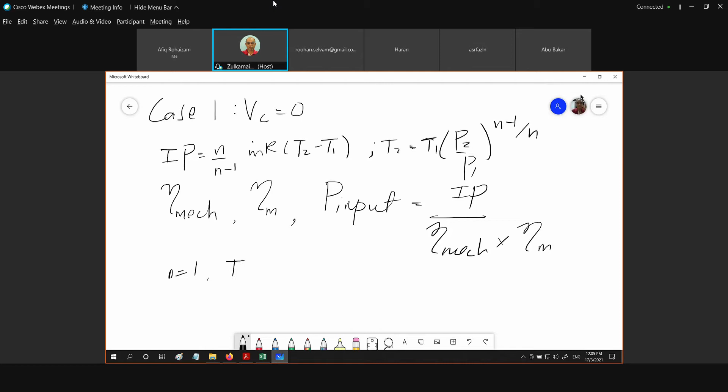So in this case, the power input to the air is equivalent to IP divided by the mechanical efficiency and the efficiency of the motor itself, right? Then we look at the critical minimum input of power into the air, where the ideal case is n equal to 1, so T is constant. We are left with a power stated as P iso, or P isothermal, which is equal to PV ln P2 over P1, equal to m dot R T ln P2 over P1.

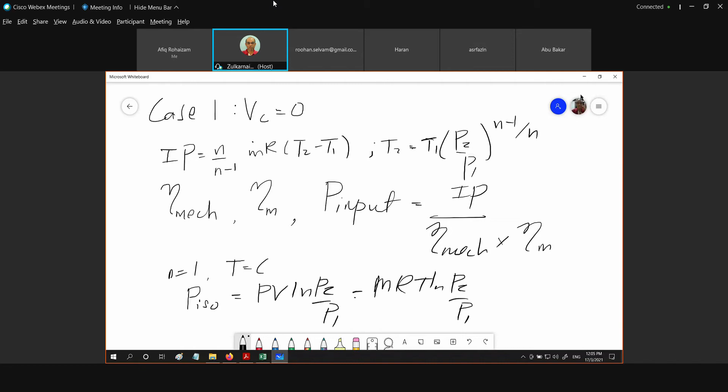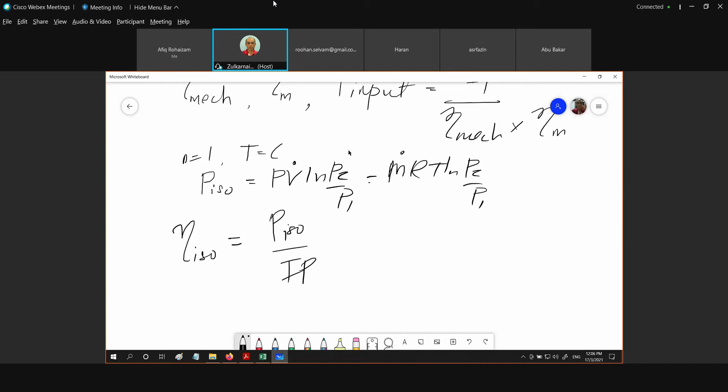When we look at the P iso, we have another parameter called the isothermal efficiency, which is equal to P iso divided by the IP, to see how far apart the minimum, ideal case of compression with T constant is from the IP. So this is what we have looked at, right?

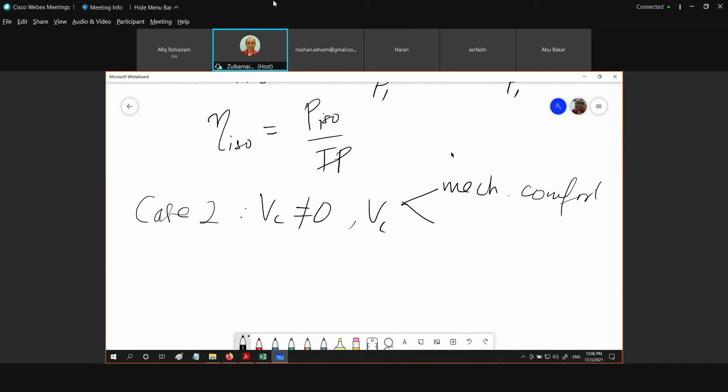One more thing we looked at is case 2, where VC is not equal to zero. Why do we need the VC? Because we want mechanical comfort, to allow the expansion of different materials when heat is involved in the compression process. Another reason for the VC is that we want a gap, or space, for the valve, right?

So with the VC, the clearance volume, previously the mass of air intake to the system is MA, for the case of VC equal to 0. But when VC is not equal to 0, the air inlet to the compressor is MA minus MD. So it's less air mass input. That is the drawback of having VC not equal to 0.

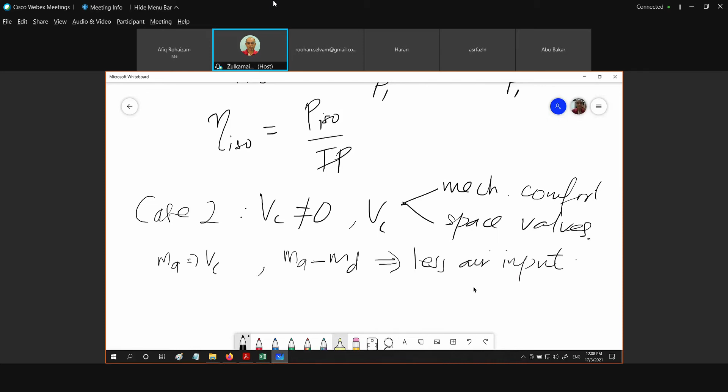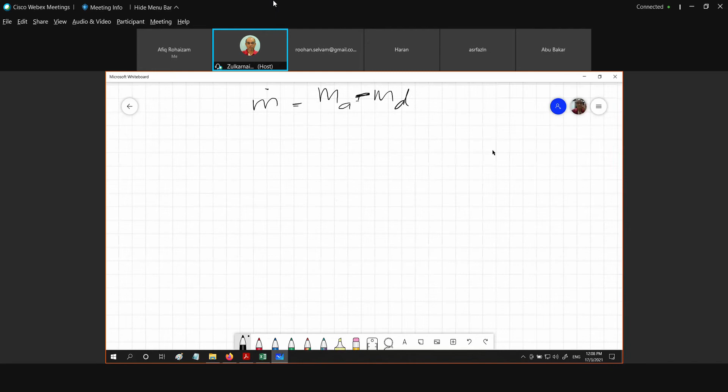As far as the IP is concerned, it's still the same formula: IP equals n over n minus 1, m dot R (T2 minus T1), but in this case m dot is equal to MA minus MD. For VC equal to 0, m is equal to MA. You can refer to the PV diagram. Now I want to look at the diagram for the case of VC not equal to 0. So this is our PV diagram.

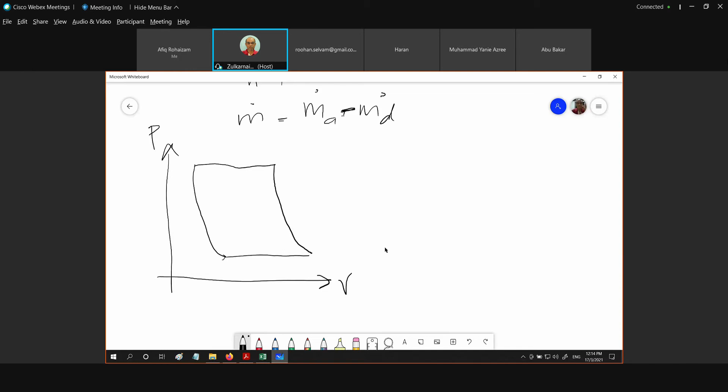Okay, so this is A, this is B, the compression process, and then B to C is the delivery process, and C to D is the expansion process due to the leftovers of air inside the clearance volume. Okay, so this is VA, this is your VC, right? And then this is your P1, and this is your P2. Okay, this is what I'm talking about.

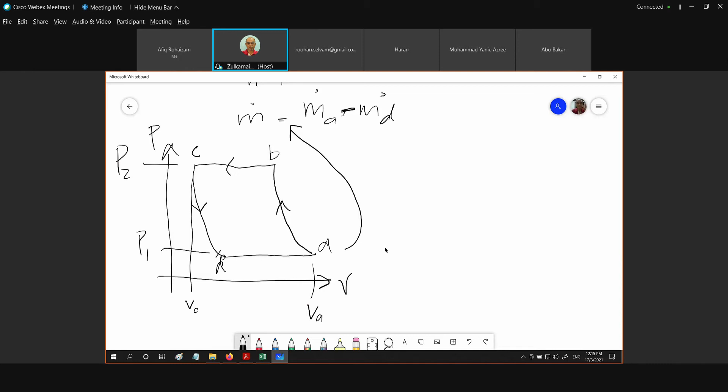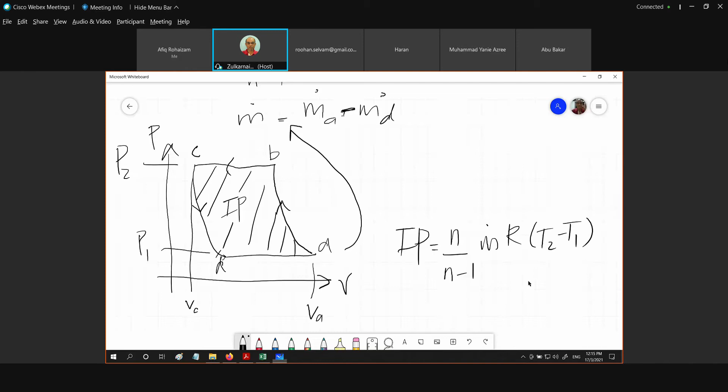The m dot is equal to mA minus mD, this part and that part. Okay, so in order to get the IP, which is the area of this shaded cycle, the IP equation is still the same, n over n minus 1, m dot R (T2 minus T1), whereby T2 is still the same: T2 is equal to T1 multiplied by P2 over P1 to the power of n minus 1 over n, right?

But in this case, the m dot right here is equal to m dot A minus m dot D. So this is the part for the induction of fresh charged air. This is in terms of kilogram per second. But if you look in terms of per cycle, this is equal to mA minus mD.

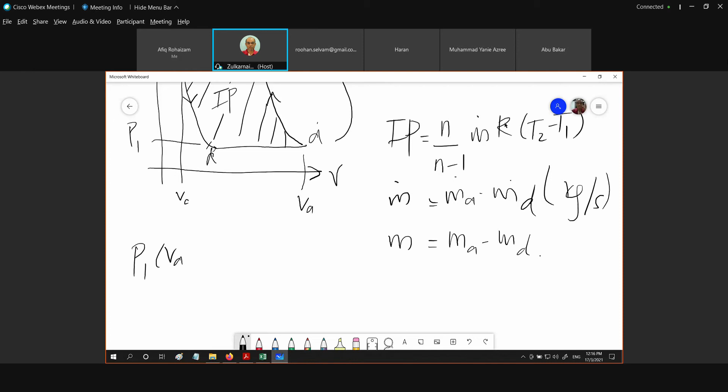Okay, and at this P1 condition, we can see that P1 (VA minus VD) is equal to mRT1. This is state 1. This is what we can use at point A, whereby P1 (VA minus VD) is equal to mRT1. Right? So this is the first equation that we must know.

And then after that, we look at how we relate VA, VC, VD in terms of VS. Okay, so we want to put VA minus VD and VC in terms of VS. Usually, VC is given as a percentage of VS. Let's say we take 5%, for example. So this is what we have: VC is equal to 5% of VS.

Right? So if you want to find VS, we look at our PV diagram. Okay, bear in mind, we want to calculate what is VS. So if we look at the PV diagram, what is VS? VS is the swept volume. So our VS should be from this point up to this point. So this is the VS.

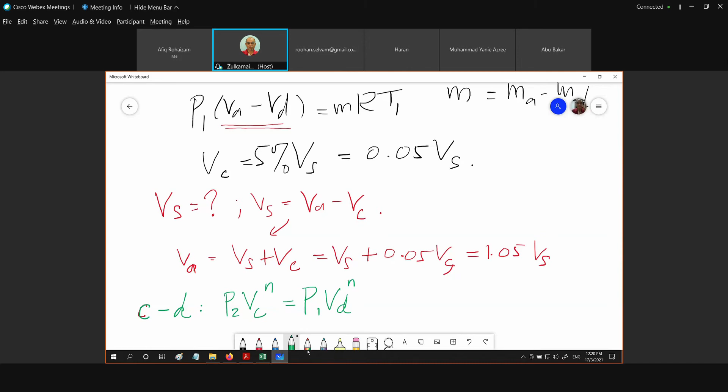So to look at how we change VD in terms of VS, we look at the process from C to D, whereby at point C we have P2 VC to the power of n, which is equal to P1 VD to the power of n. So the process from C to D is the polytropic expansion right here.

This is PV to the n equal to constant, same thing for A to B. The expansion and also the compression process are polytropic. So what we have right here is PC VC to the n equal to PD VD to the n. What is PC? PC is equal to P2. And what is PD? PD is equal to P1. So this is what we have.

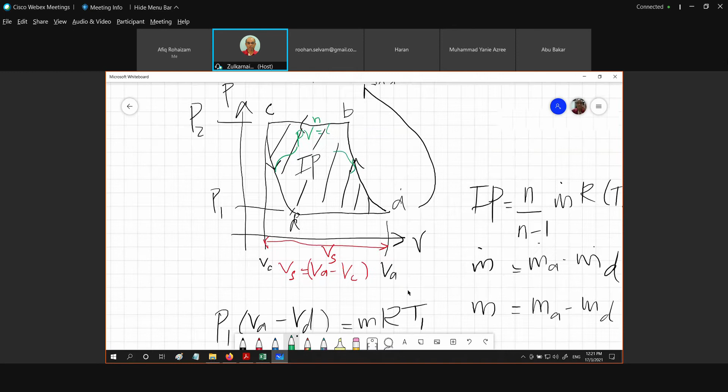Okay? So this is what we have. So right now, we could write the VD. So the VD over VC to the power of N is equal to, right? So this is VD over VC equal to P2 over P1. Then we write VD as our subject. So what is VD? The VD is equal to VC times P2 over P1 to the power 1 over N.

And again, we know that the VC is put in terms of VS, this is 0.05 VS times P2 over P1 to the power 1 over N. Meaning that if we know the pressure ratio and the value of N, then we could have the VD in terms of VS. So now we have put the VD as a function of VS. Then we got this VA minus VD as a function of VS. Okay? So right now, we need to know what is VA minus VD.

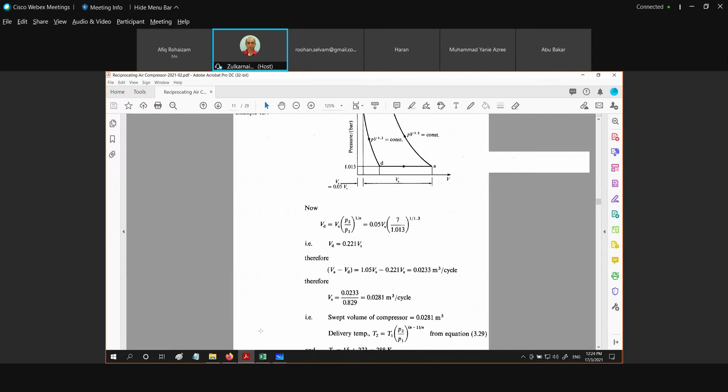So right now, let us look back to the question that we looked at the last 2 days. This is the question. Okay, put it on the whiteboard.

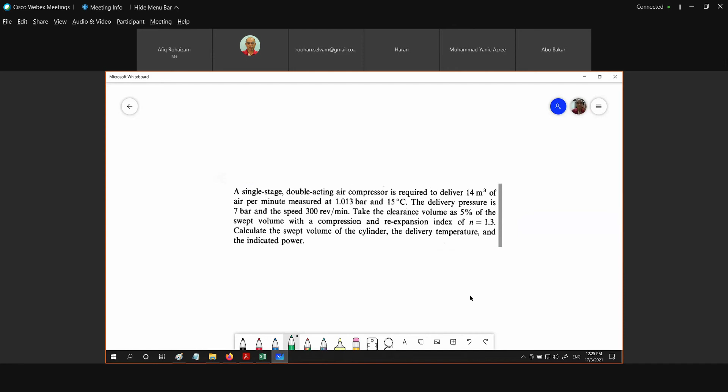Okay, a single stage double acting compressor is required to deliver 14 meter cube of air per minute, measured at 1.013 bar and 15 degrees C. The delivery pressure is 7 bar and the speed is 300 rpm. The clearance volume is 5% of the swept volume and the compression and re-expansion index is 1.3. Calculate the swept volume. The same thing, right?

So remember, this value is for double acting. So we might convert this for one portion of the compressor. This is for both sides of the compressor because it's double acting. So in order to get the VS, we need to see only one side. If you maintain this 14 meter cube value, then you will get 2 VS, both VS. But the question asks for only VS. So you need to divide by 2.

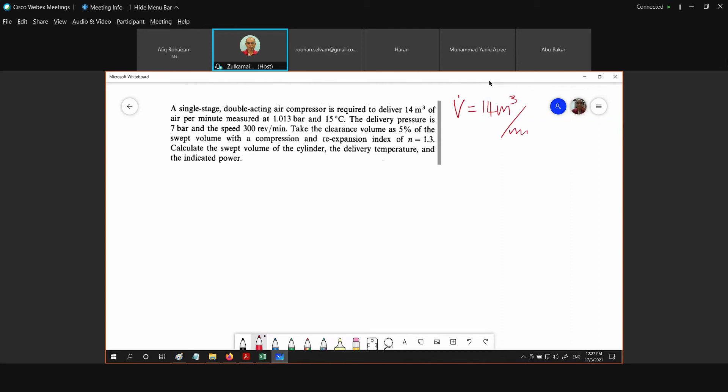Okay? So if we put all the parameters given, the V dot is equal to 14 meter cube per minute, measured at the pressure P1 equal to 1.013 bar, and T1 is given as 15 degrees C. Then the P2 is given as 7 bar. Then the speed N is equal to 300 RPM. Next, the VC is given in terms of VS, 0.05 VS. Okay, so we need to get our VS. The question asks for VS.

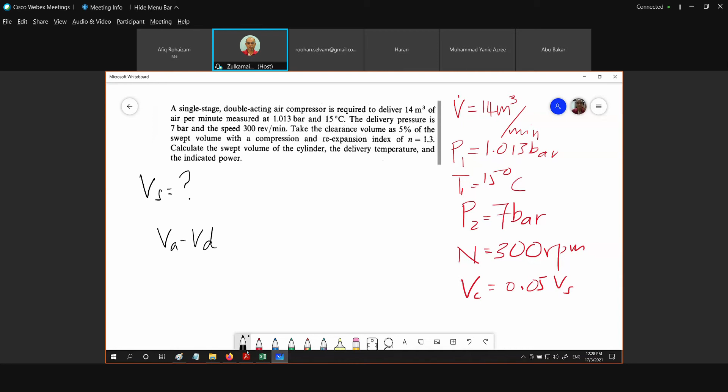Okay, so first we need to get VA minus VD. So VA minus VD dot, like I showed before, is equal to m dot RT1 over P1. In this case, we know the R value and the T1 value, then we need to define m dot. How to get m dot? We take it at point 1. This is equal to P1 V1 dot over RT1.

Okay? What is our P1? P1 is 101.3. I will put it in kPa because I'm going to use R as 0.287 kilojoule, meaning the pressure has to be in kilonewton or kPa. Then multiply this by 14. But remember, we need to convert for one side, so this is 14 divided by 2. And then you see that this is in minute, so we need to change from minute to second. This is for the conversion of the V dot.

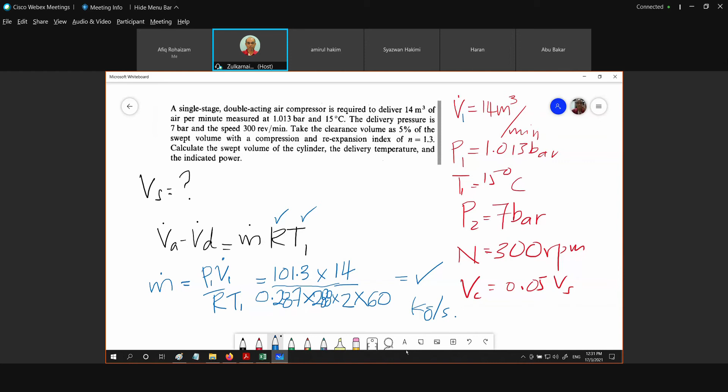So once you have your m dot, what do you get? You get your VA minus VD, correct? So this is your VA minus VD, which is equal to V dot A minus V dot D divided by N. Okay, so from here, once you solve your m dot, then you get VA minus VD dot in terms of value. And this value you put in here, then you get your VA minus VD in terms of meter cube per cycle. Again, be careful with your unit.

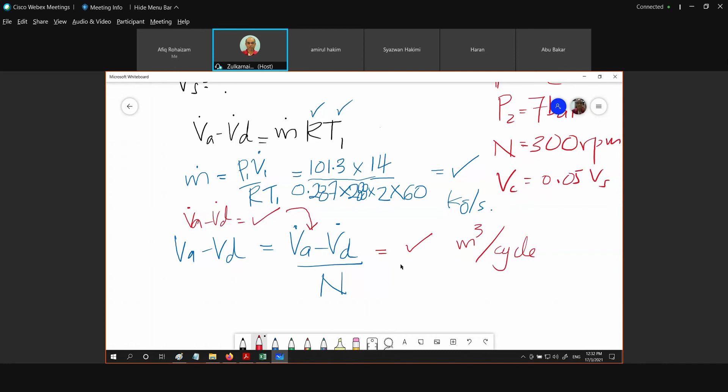If you put right here, your m dot is in kilogram per second. Right here, you are going to get meter cube per second. Then you need to change your 300 divided by 60. Okay? So I think that is being shown. Right now, I want to show you the formula involved because all the figures are inside the text. So when you have your VA minus VD, then you need to put your VA.

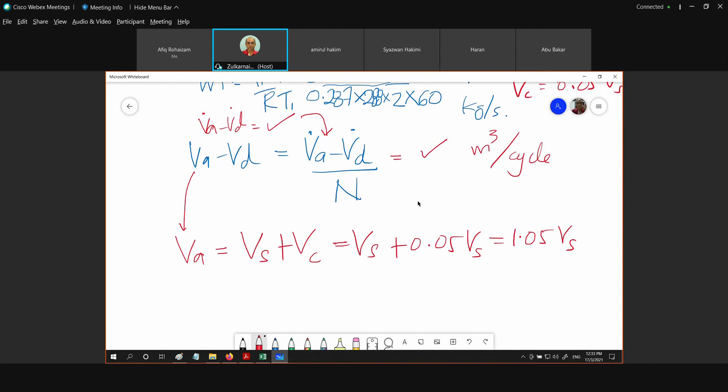What is your VA? So VA is equal to your VS plus VC. This is equal to VS plus 0.05 VS. So as far as VA is concerned, you get your VA equal to 1.05 VS. This will solve for that VA. Okay, then what you do, you put your VD in terms of VS. So again, what is your VD?

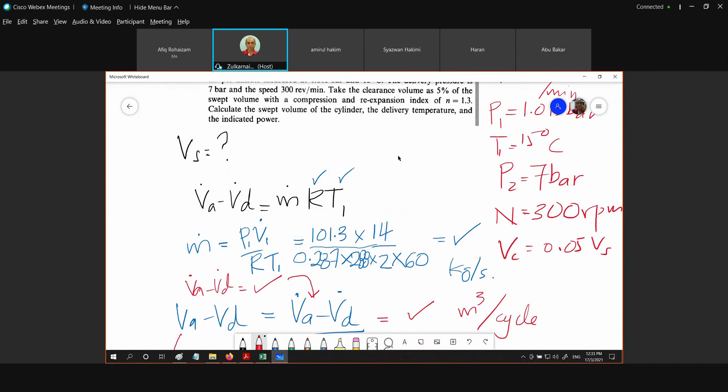Your VD, as I have shown just now, is equal to VC times P2 over P1 to the power 1 over N. Then you put in terms of 0.05 Vs. Your P2 is 7. Your P1 is 1.013. 1 over N, and the index of expansion and compression is 1.3 right here. So you put here 1.3. Can someone calculate for me how much that is in terms of Vs?

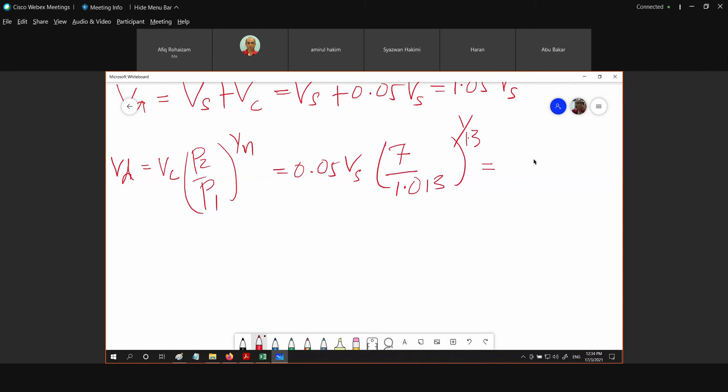Is it 0.2212 Vs? Yes. How about others? Do you get the same figures? Yes, sir. Thank you very much. So now you have solved your VA and your VD. So what we have right here is VA minus VD, right? 1.05 Vs minus 0.2212 Vs. So you are getting one value in terms of Vs.

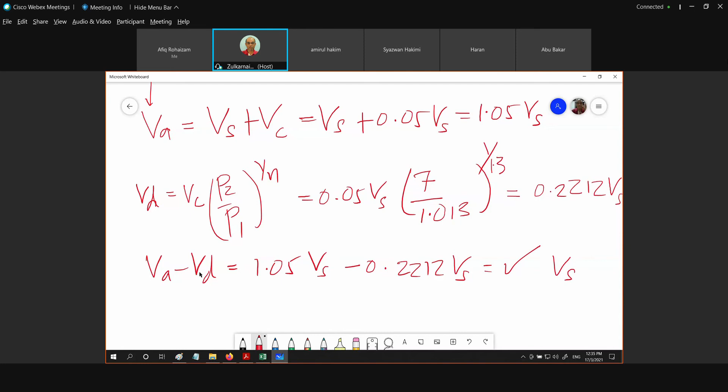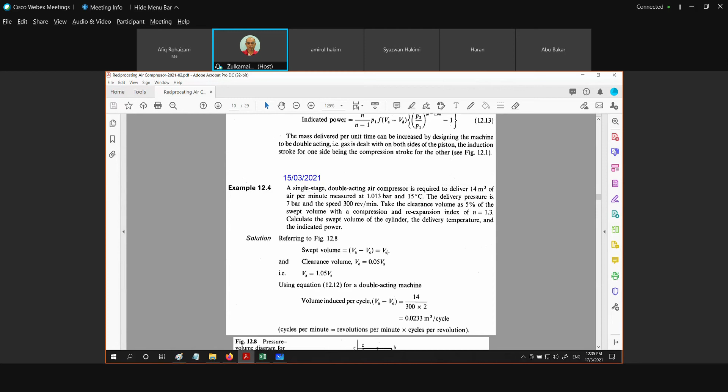And then what you do is equate this VA minus VD in terms of Vs to this value. Okay, this value. You equate that. Then once you equate, you solve for your Vs. Okay, from here, you know that your Vs is solved. So that is what is being shown right here. See? So this is your swept volume. VA equal to Vs plus Vc. So this is the clearance volume given. This is your clearance volume.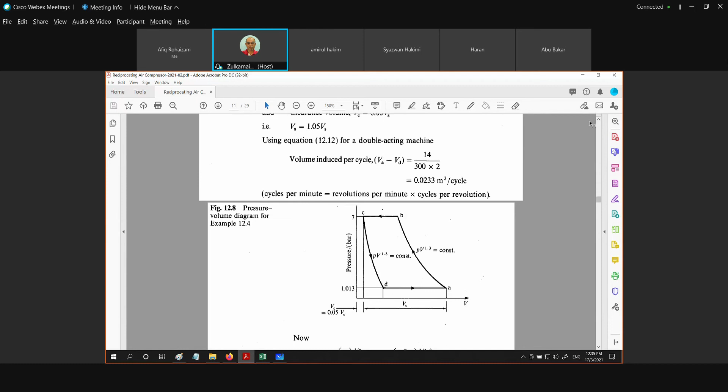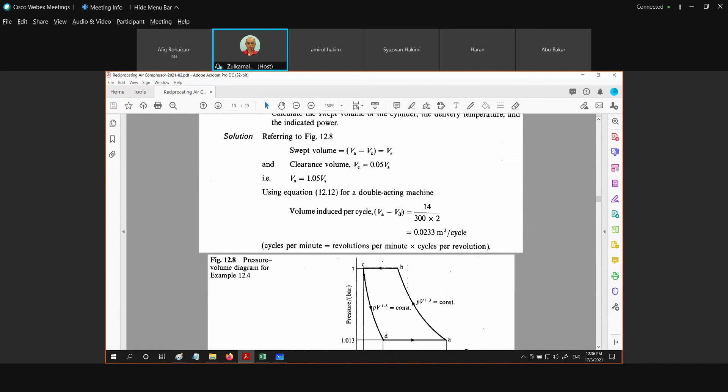See now, the VA minus VD is equal to 14 divided by that. So here you put VA minus VD, 14 divided by 300 divided by 2. Okay, now the 14 is maintained in meter cube. So you get your VA minus VD per cycle. Then again, this is your VD. We have done that. Then we get the VA minus VD 0.0233. Then you equate this, and you get your swept volume. So this is your swept volume. Okay. Next one.

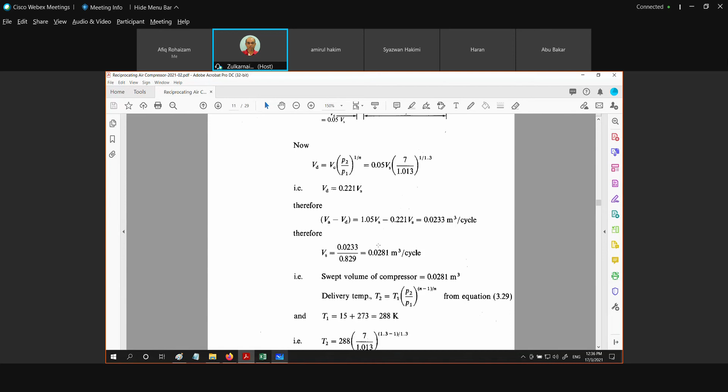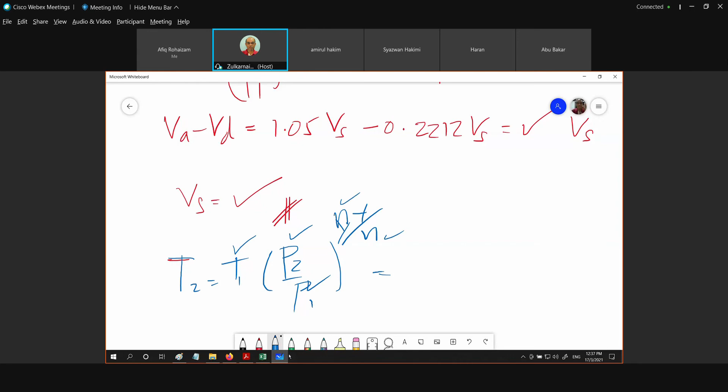The next question is to get your IP. Oh, sorry, the delivery temperature. So of course, for the delivery temperature, we are going to use the formula of T, yeah? T2 is equal to T1 times P2 over P1 to the power N minus 1 over N. So in this case, everything is given, then you get your T2. Next one is to get the IP, if I'm not mistaken. The indicated power.

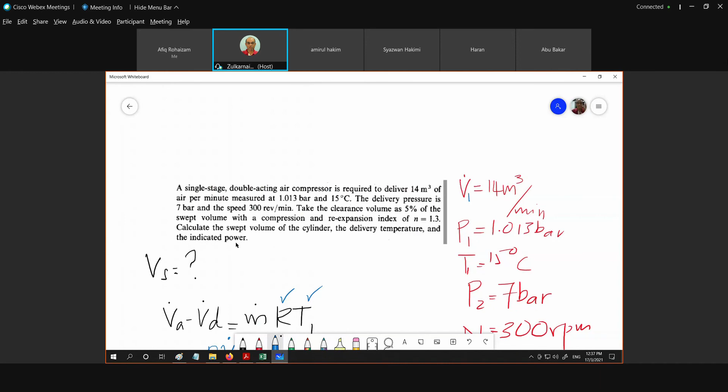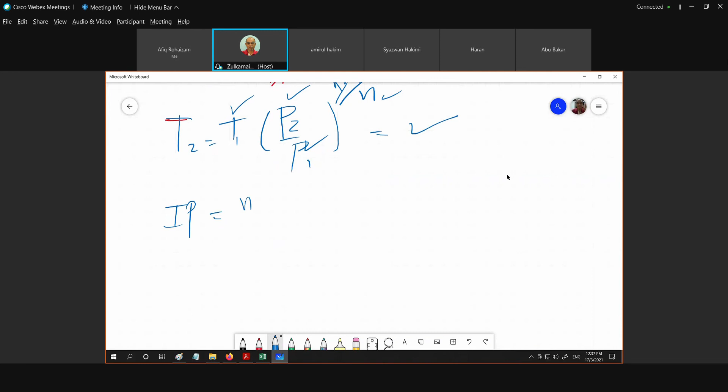So the IP is equal to N over N minus 1 times m dot R (T2 minus T1). I like to use this equation in terms of temperature. You can also put it in terms of pressure ratio, but be careful, sometimes you mix up the N value. This can also be written as N over N minus 1 m dot R T1 times (P2 over P1 to the power N minus 1 over N, minus 1). You can also use this formula, no problem. But I like to use this formula. It's very neat because you have defined your T2.

Right, and then again, you could be asked to get the PISO. So PISO equals m dot RT ln(p2 over p1). So be careful, right?

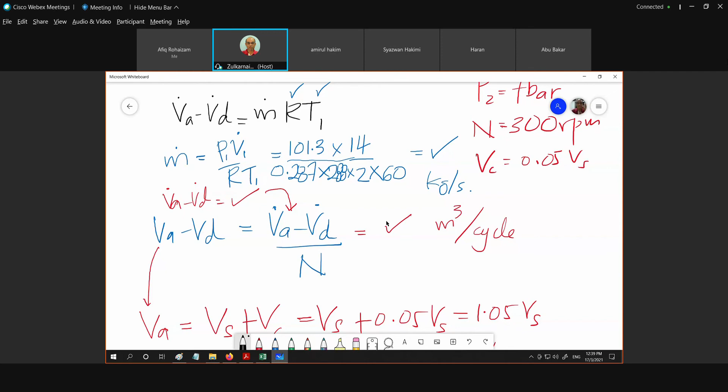Guys, remember this one? We have divided by 2, right? So this m dot is the one side of m dot, only one side because we have divided by 2. But as far as the IP is concerned, here, if you use the same value, the m dot, then you need to multiply by 2.

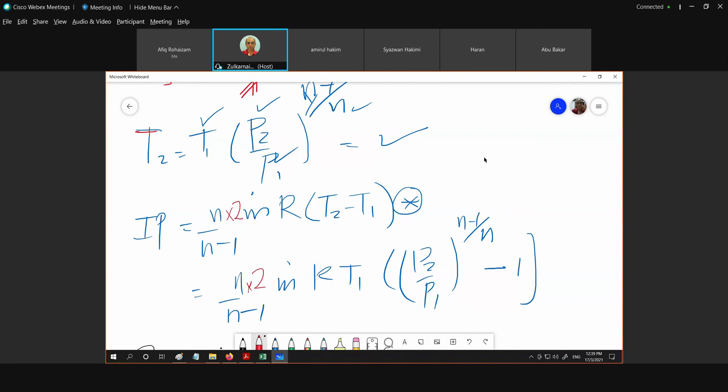2 m dot, again here also 2 m dot. Sorry. So please take note, because the m dot we have calculated before is for one side, but the IP is for both sides, for the compressor itself.

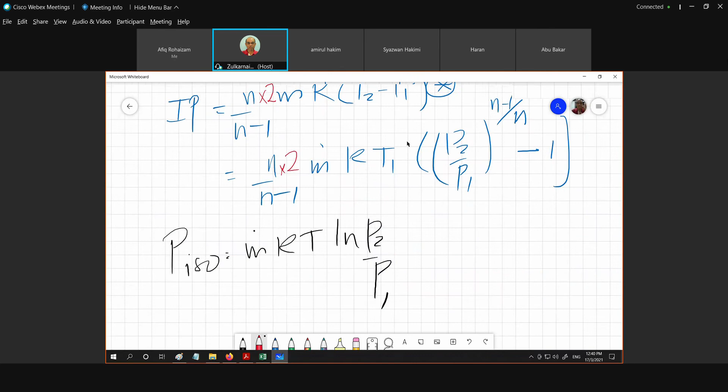Same goes for the PISO, the PISO also you have to multiply by 2 right here. And once we have determined the PISO, if this question asks for PISO, then most probably you'll be asked to get what is your isothermal efficiency, which is equal to the PISO divided by the IP.

So this is the typical question for reciprocating compressor. If you do all the questions asked and add up with the PISO, and then maybe add a bit on the mechanical efficiency, or maybe add a bit more in terms of the motor efficiency or the engine efficiency, then this type of question, the difficulty is treated as moderate for exam question or for the test question. Bear in mind, take note, your test question level is equally as exam question.

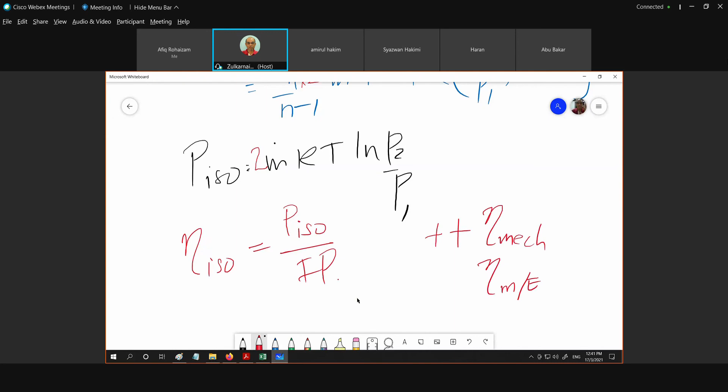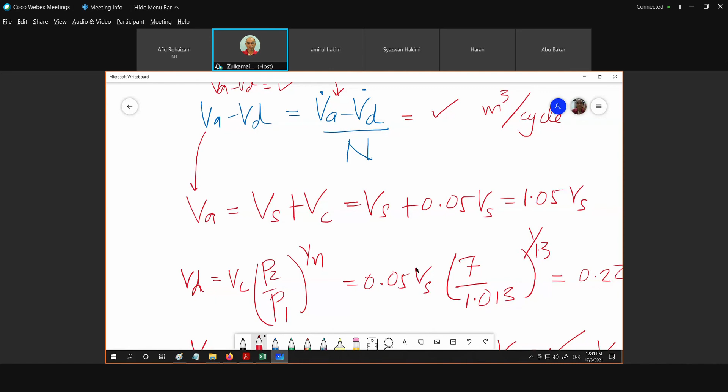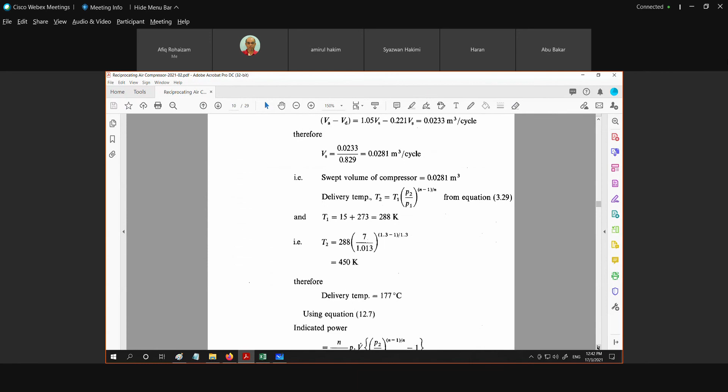Okay, any question? Guys, any question? No, sir. Okay, thank you very much. No question right now.

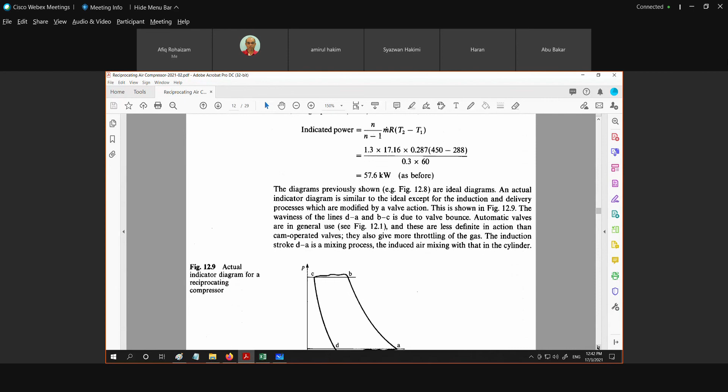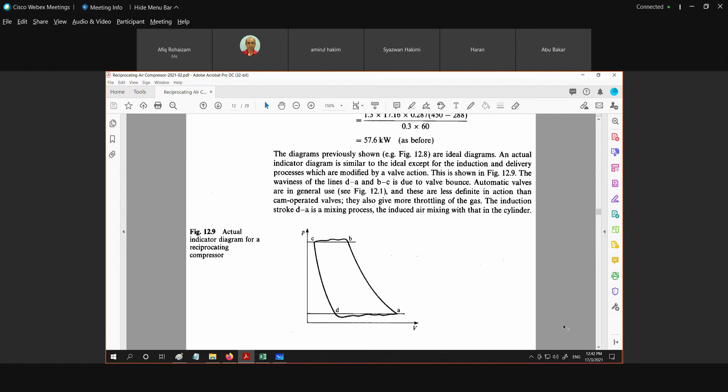Going to the next part. This is just to explain that usually your petal valve or your valve is usually wobbling, so you won't get a very smooth type of delivery and intake. But in our case, the analysis is always assuming that the delivery process from B to C is at constant pressure, and for the induction process D to A is always at constant pressure. So a bit of fluctuation because of the wobbling.

Now we go for the volumetric efficiency. Why do we have volumetric efficiency? You know what is volumetric efficiency? The volumetric efficiency is the ratio between the actual air coming into the cylinder compared to Vs.

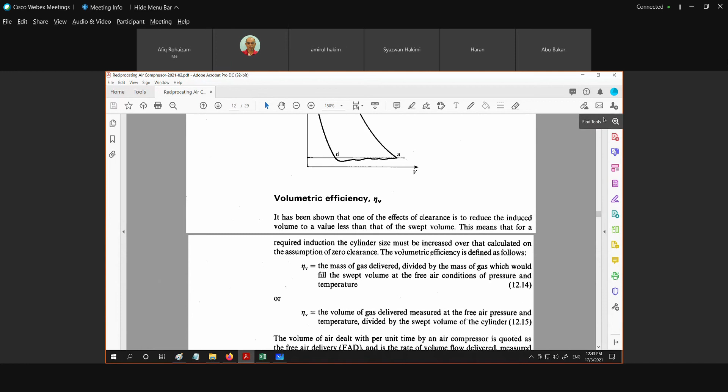Here is our Vs. The Vs should be from this point to this point, so this is our Vs. So is this actually the V going in? The actual volume that going into this cylinder is V, M RT over P.

It usually depends on the ambient condition. So your T and P is not the same as what we have at this part. So usually the inducted air volume or mass going into the cylinder is reduced by this VC. So the difference or the reduction in this value of V is being put into the volumetric efficiency.

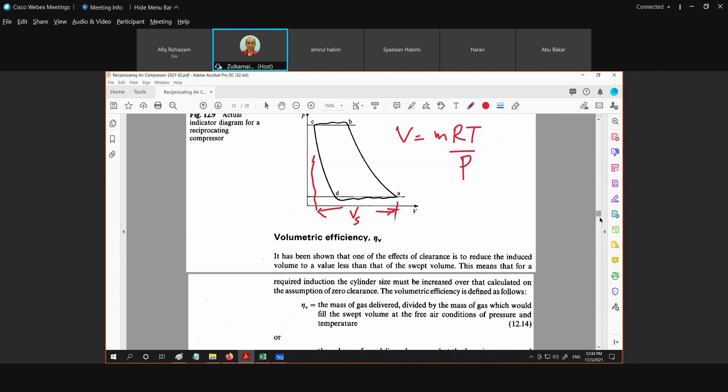Right, so this is the official or fundamental definition of volumetric efficiency: the mass of gas delivered divided by the mass of gas which will fill the swept volume at the free air condition of pressure and temperature. So the free air condition, meaning that what you have is the P and T of the ambient.

So this is the mass of air actually delivered, divided by the mass if it will fill the swept volume. So in this case, for the mass of air delivered, this is M, which is equal to PV over RT. It doesn't matter whether you are going to put M dot right here or there's no dot. If you put dot right here, then there is dot right here. So assuming that the P and T is the ambient condition.

Divided by M, one more M, this is equal to what? Assuming it's still the ambient condition, but it's being filled up at Vs, the whole Vs, divided by RT. So I'm using M dot, to be consistent, so this is also V dot. So let us differentiate between the M dot actual and the M dot to fill the whole Vs. So I'm putting right here an S.

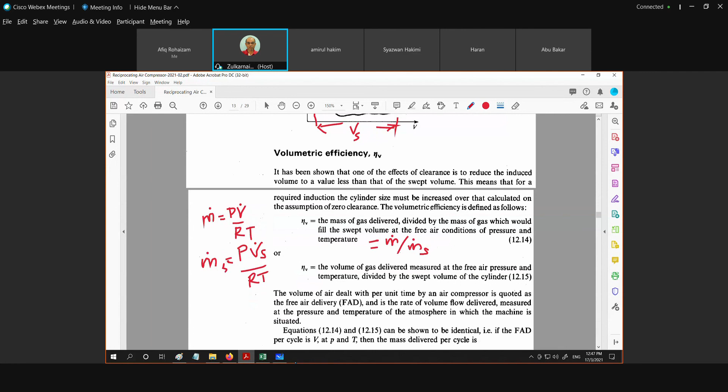This is equal to M dot divided by M dot S. So if I put M dot by M dot S, then I can also write the volumetric efficiency as this divided by this. You see here, this is P, this is R, this is T - the same P, the same R, and the same T. So they will be cancelled off.

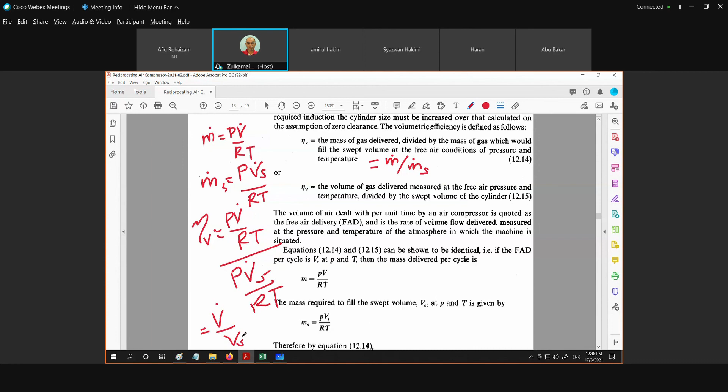So this is PV dot over RT divided by PV dot S over RT. So what happened? Final equation will be V dot divided by Vs. So we could write the volumetric efficiency using two equations, either mass by mass or volume by volume. So these are the two equations that we can use. See right here?

For your information, I would really like to use this equation because the definition is written in terms of volume by volume. So it's related or tallies with what is called volumetric efficiency. It's not called mass efficiency, it's called volumetric efficiency. That's why I told you V over Vs.

So for the case of Vc equal to 0, we are always getting the volumetric efficiency as 1. For the second case, the volumetric efficiency will be less than 1. This is what we have when our system has clearance volume. You see, when there is no clearance volume, this is clearance C - when there is no clearance volume, the volumetric efficiency equals 1. You can try it, because V is Vs.

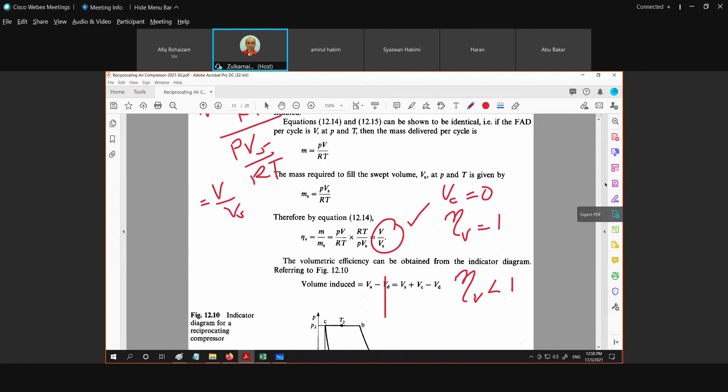But when we have clearance volume, then our volume or mass of air inducted into the cylinder is going to be less. So we can have right here volume induced due to the clearance volume is VA minus VD. So in other words, we can also write the volumetric efficiency is equal to VA minus VD divided by Vs. That is our value.

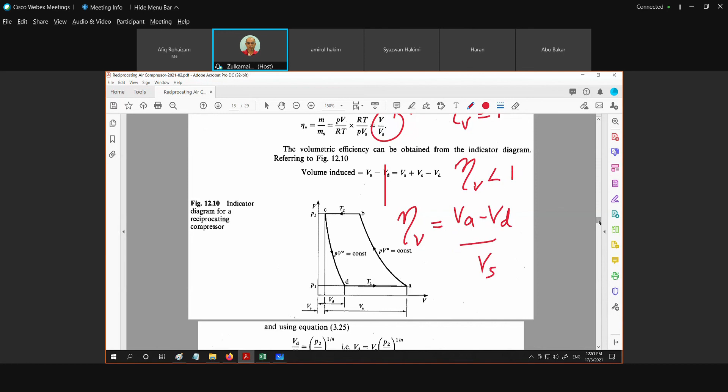So remember what is our VA minus VD just now, for that example just now? The value - VA minus VD is 0.82, so it's equal to 0.82 Vs. So you divide by Vs, then times by 100, you get 82%. That is your volumetric efficiency. For the same example we did, we get VA minus VD is 0.82 Vs. So that is our volumetric efficiency.